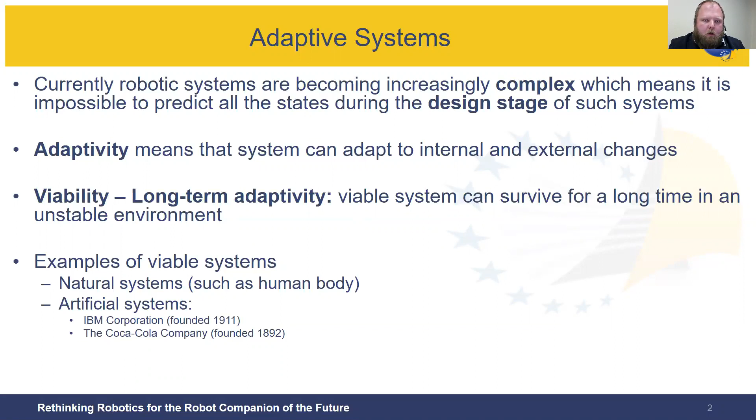So we wanted to ask ourselves, is it possible in multi-robot systems? For now, it has not been achieved, but we would like to check if existing models for long-term adaptivity from organization theory can be applied also to multi-robot systems. And in particular, we took one model that, according to our literature review, was the most promising, named Viable Systems Model, and tried to apply it to technical systems, in particular multi-robot systems.

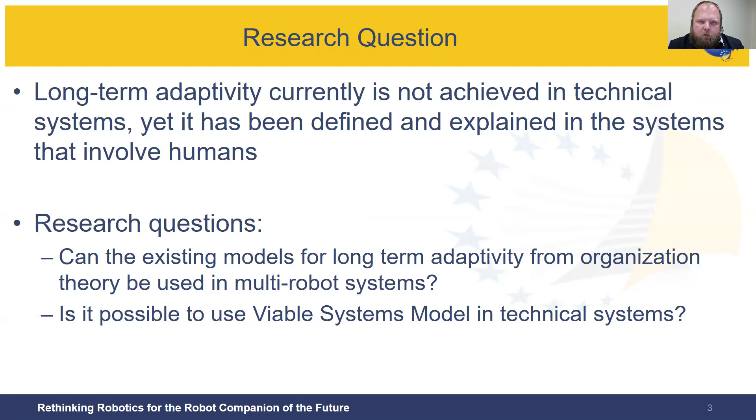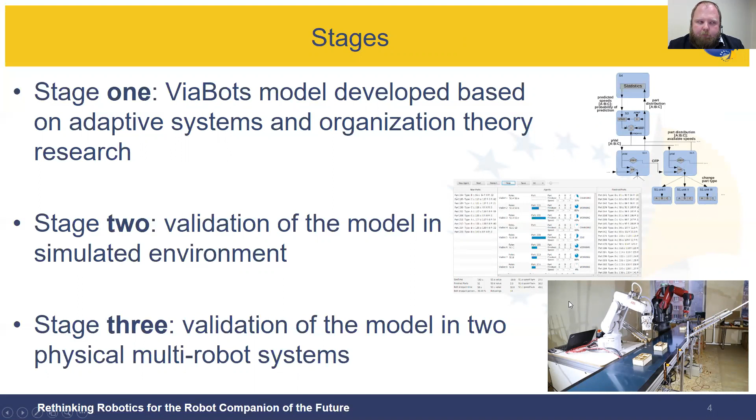So what is this viable systems model? First of all, it is the model that focuses on organizations and not robotic systems. On the other hand, it's validated on both companies and also many other use cases like structuring Chile economics. So the bottom line, it is working in an organization.

So what it is, it says that the organization to be viable needs to have 5 types of functions or 5 subsystems. The first of them is operation, the actual workers doing actual work. You need the local control for them or local management. This is system number 2, which organizes the work of a team, like in case of a university, it's a research lab or lecturing department or any other structural unit.

When you cannot solve the matters inside your department, you need a global control in your organization. This is a necessity, but in many cases it's not enough because you also need to understand what's happening around your organization, where you need to go. So you need intelligence that predicts what's happening, and also strategic development, where you are heading. So the policy, which is system number 5.

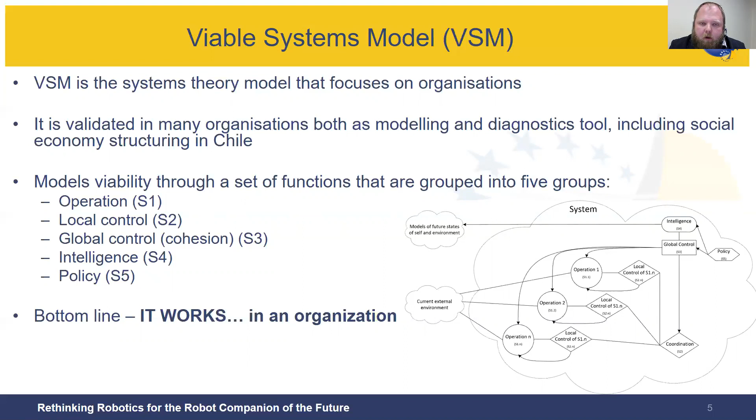So we took this model, and what we did with it, on one hand, we have robotic systems, autonomous robots. On the other hand, we have this model, the viable systems model. The model defines which functions are necessary for the system to be viable. On the other hand, the robotic systems define what resources, what machines are existing in the system. So for each such machine, we defined an intelligent agent, which formed a multi-agent system. And this multi-agent system is an abstraction layer for the management of such a multi-robot system.

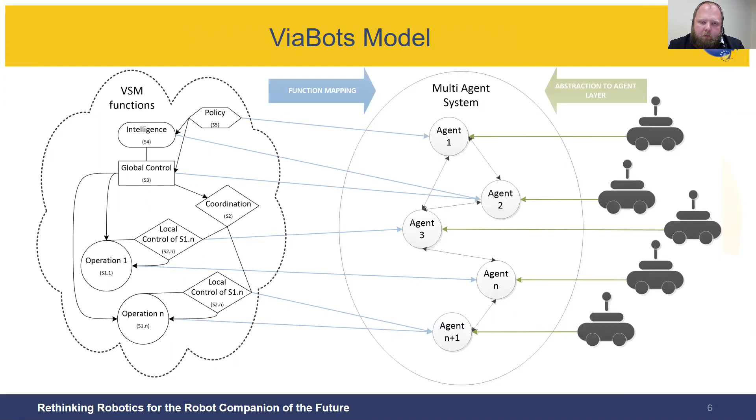And each of these agents is taking these roles dynamically. So we have to define that one particular agent is taking the intelligence role, at least one is taking global control, and also for each operation that we need to do physically, where we need our particular workers, we also need an agent that is doing this. And such an abstraction allows us to reorganize who is doing what at a particular moment to make the system capable to adapt to changes in long term. So what we did with such a system, we created two multi-robot systems.

The first one was the conveyor belt based production line, where we started with a simulated environment, where the conveyor belt was simulated and it delivered 3 types of parts, and each of them must be processed by one worker. And so the system was these workers, the multi-robot system, where each robot was a worker doing a particular job

with a particular part. So the goal of the system was to process incoming parts fluently, to keep the conveyor running, because if you cannot process the part that is coming, you have to wait for the robots that can do that. So how did we implement the particular model?

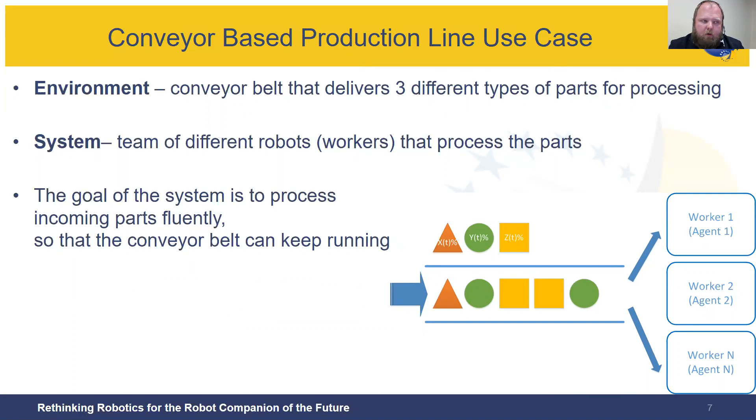And if they see that it's not enough, they ask other ones by sending a CFP message to another S2 coordinator to get one more worker. If this guy says, okay, I have more than enough, or I have a better situation than my colleague, I can give one worker away. Of course, such a simple mechanism will not always lead to an optimal distribution.

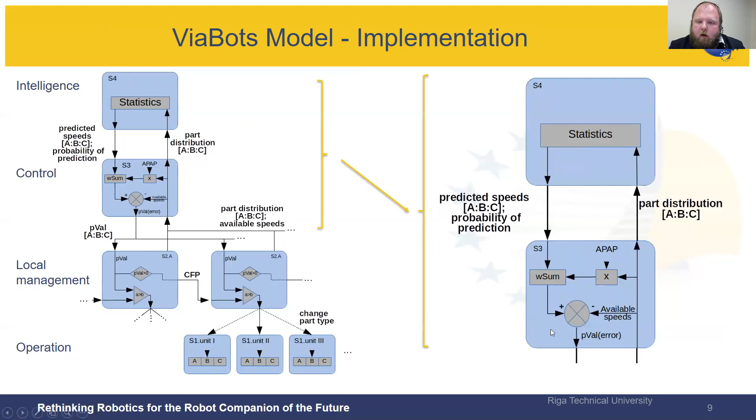That's why we need the control that knows all these numbers, how many workers are dedicated to each job, and it can redistribute based on those numbers at the S3 level when we see that S2 fails. Moreover, we have to know what's happening in the system, what's coming next. Maybe we don't need to change the tools to assign the worker to another department. And that's why we need forecasting or statistics, which is system S4, or in this picture on the top of it. So that was the model in very brief.

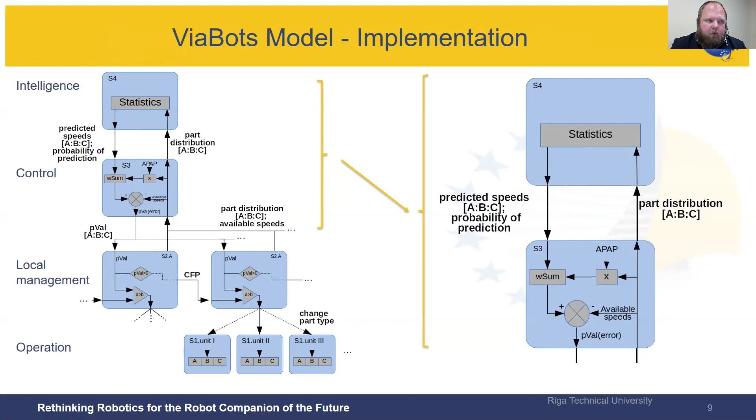And based on that, we first implemented a simulated environment. Here you can see all the workers, what they are doing. So Viabot 1 till Viabot 8 in this example. And for each of them, you can see what part they're processing, what the capabilities of this robot are, and the current status. For example, it's charging or doing a particular task, or is waiting for a task, or is idle.

Then you can see the log where we have finished parts, the upcoming parts, and the resulting values. So how many parts were processed, how much time it took, how much time we were waiting, and how much workforce we have dedicated for each of the parts. So this allowed us to quickly simulate many different scenarios, and the results of the experiments were the following.

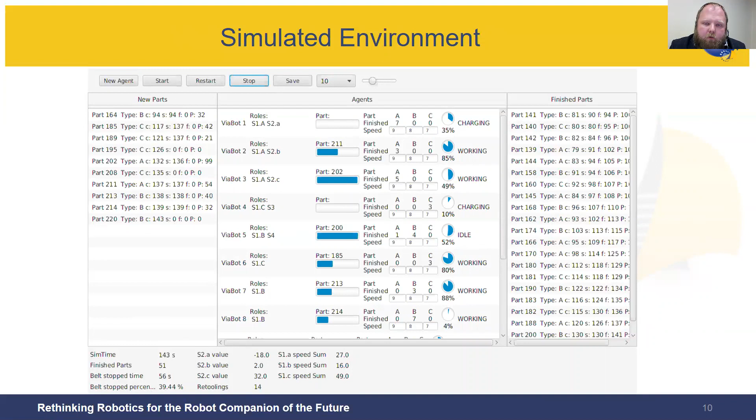We divided our experiments into parts. So within these stages or parts, we changed the part distribution. These are percentages, so 40% task A, 30% task B, and 30% task C. Here the distribution is completely different, as you can see, different, different, and different. So we kept the environment changing to see how the system adapts.

And we did 4 experiments, or 4 types of experiments, and these lines are average values. So in the blue line, all the model is active. Then we turn off the intelligence. Then we turn off the global coordination, and then we turn off global coordination and local coordination.

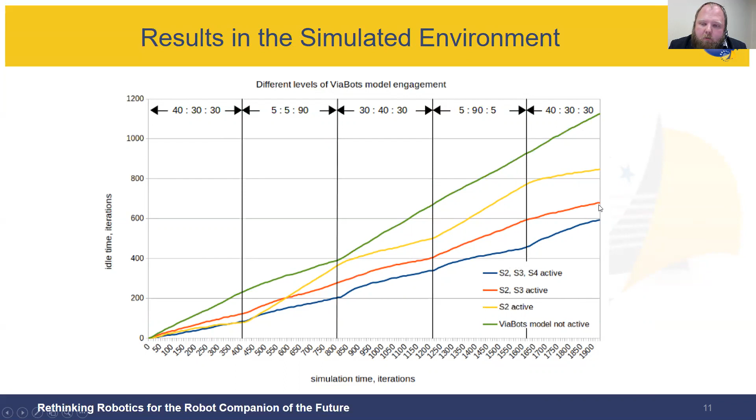As you can see, compared to having no organization at all, with the full model we have a twice more efficient system in terms of how much time the conveyor is stopped, because we can have no workers capable of processing. Also, if we compare it to the system without intelligence, then we also already have approximately 10% improvement.

Based on these encouraging results, we created a physical conveyor-based system where we again took a conveyor system with a part mounting task, and it was simulated with just putting cones into boxes because we didn't want to pay a lot of attention to hard part mounting tasks, so it was a simple one. We had heterogeneous robots: Baxter, an ABB manipulator, and simple custom-made 3 degree of freedom manipulators. You can see that the system is highly heterogeneous in terms of available machines, available resources, and speed of action that they can do, even in such a simple task as putting cones into the boxes.

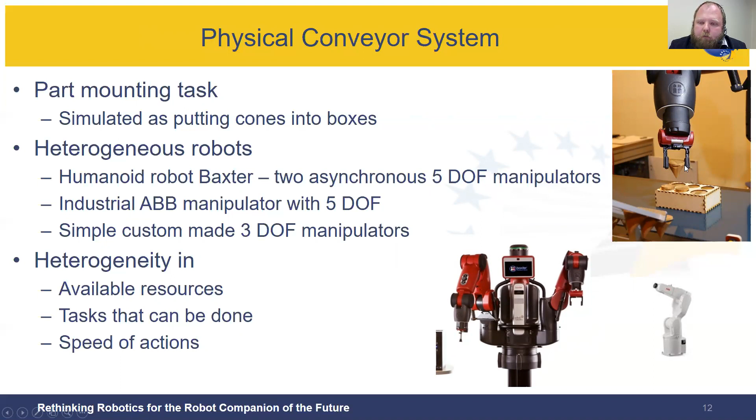So how did we implement the system? We implemented this multi-agent based abstraction layer, which is connecting everything together, starting from the user's computer, the conveyor's controller, and particular manipulators, and each of these is controlled by a particular agent. So an agent controls a manipulator, an agent controls the conveyor, and these agents are communicating to each other, and as a result, they are creating an optimal distribution of agents.

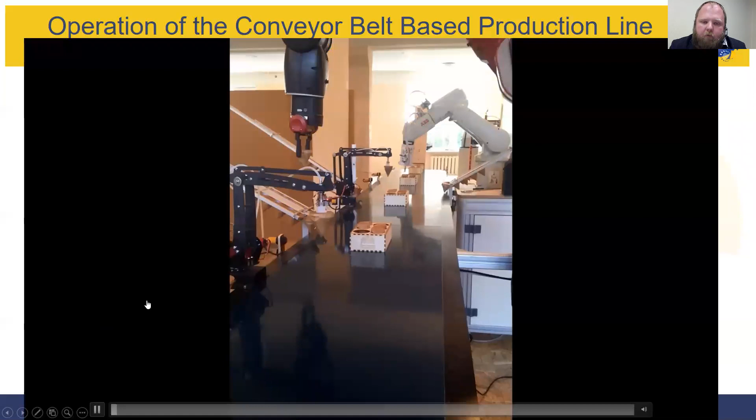So how does it look in the video? Here you can see the ABB manipulator, the Baxter manipulator, and the boxes are coming over the conveyor belt, and according to the plan, these robots are putting the parts into the necessary places. The plan is to fill in the box with the corresponding parts.

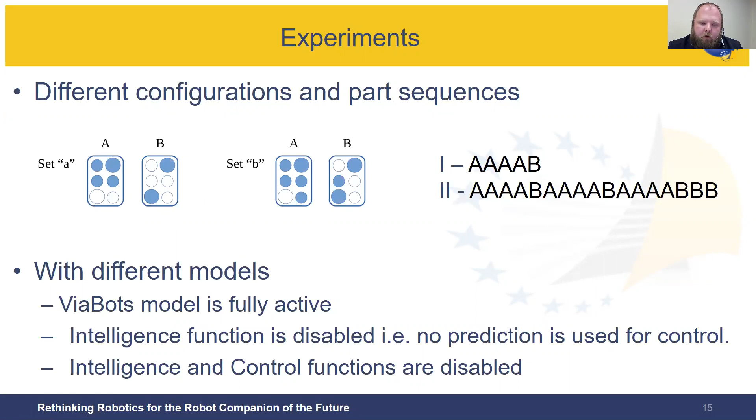So what experiments were done based on that? We changed the patterns, and we changed the order of those patterns to see how the robots can adapt. For example, in the first experiment, we have 1 box like that, 1 box like that. In the second one, we had boxes like that, and these A and Bs were put in different orders. And again, we experimented with the fully active model and part of it off, intelligent functions off first, and then intelligent and control off.

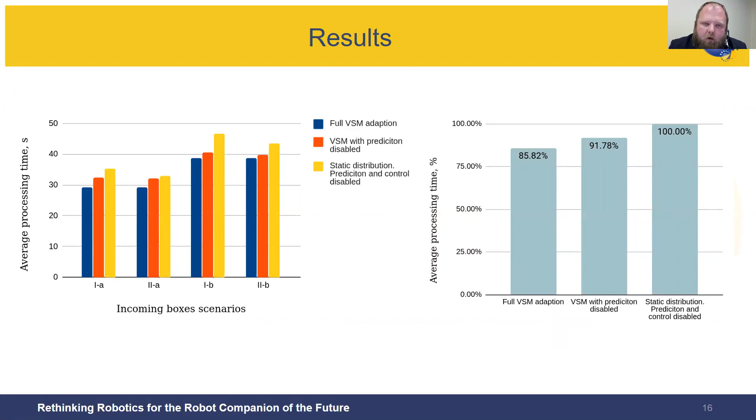So what were the results? In all 4 cases, as you can see, the static distribution, so without the model, was the worst one. If we have the full viable systems model, then the results were the best. The blue average processing time for each part is the lowest, as you can see. If we compare on average over all of our experiments, full viable systems model or no model at all, then the difference is a bit more than 14%. So this proved that such a model can increase the efficiency of a production line significantly.

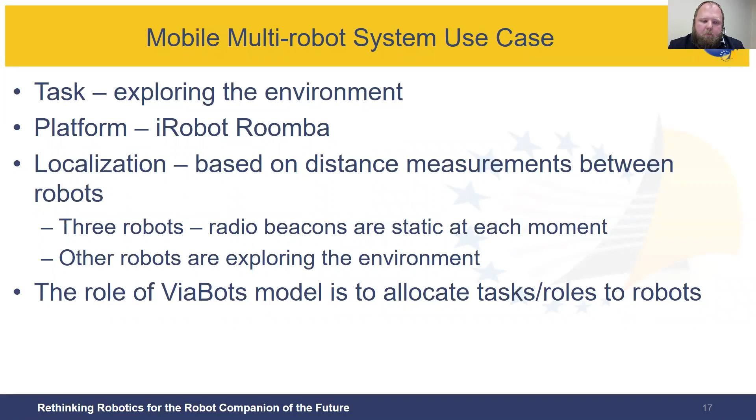Another experiment was done with a mobile multi-robot system. The task is to explore the environment. The platform is iRobot Roomba, which localize based on radio-based distance measurements between robots. So we need 3 beacons at every time, and other robots can be exploring the environment, and the role of the model is to reallocate tasks between robots.

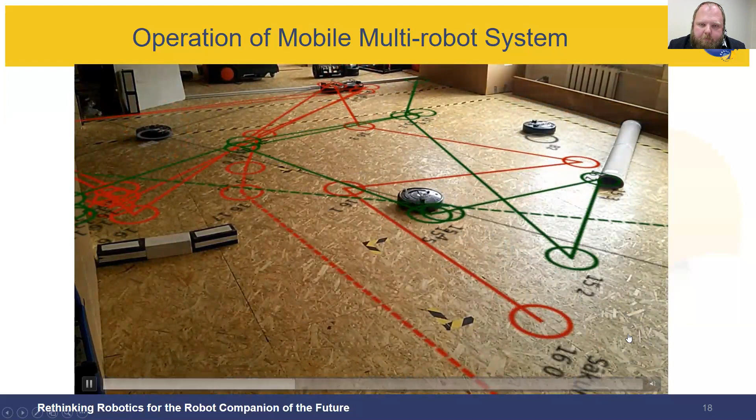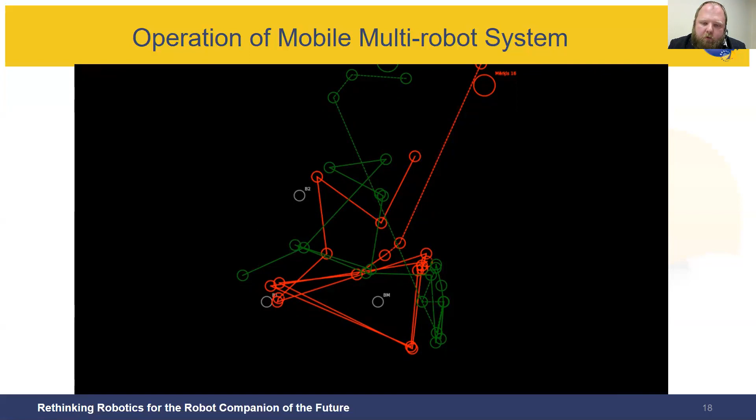So what was the result? We had 3 robots as beacons and others traveling around, exploring the environment, achieving the goals. And when the area was explored, those 3 moved forward. What did we prove with this experiment? We proved that the system can allocate the tasks as necessary using this adaptive, autonomous method.

So to sum up, as you saw, we developed an organization theory-based model for multi-robot systems. It is a general one, used for 2 different scenarios, and we validated it on 2 systems. First of all, on this conveyor belt-based production line, where production was increased by 10 to 14%, and also we tested it on mobile robots. So we developed a model, validated it, and the results are promising.

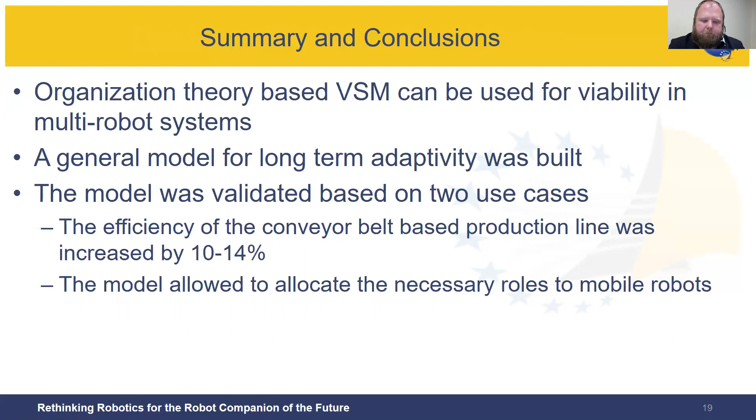Why do we find it important? Because multi-robot systems are becoming more and more complex. Designing tasks is becoming very hard because we cannot predict all the situations, and that means we need such models to implement adaptivity in autonomous systems. And we think that autonomous adaptive systems are the future of robotics. That means we need general models to implement such adaptivity.